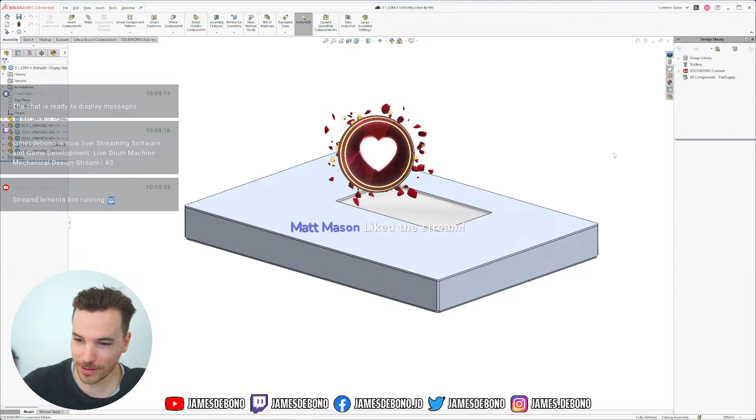It is a device which, let me show you, currently is looking like this. Matt, thanks for the follow sub, not sure what it was.

So currently looking like this. Pretty basic, it's just a box, a folded sheet metal box with a display. That's all I've gotten up to at this point.

But it will be something like, let me just bring it up. I'll just bring up some inspiration images in one second. Sorry, I should have organized this earlier. Okay, here we go. So these are inspiration devices.

It's not going to be anything like one of these in particular, but it is going to be a digital drum machine, so an electronic digital device which you can play drum loops, drum sequences with. There may be some playable elements like we see here with the sticks hitting pads. There will likely not be so much sequencing, but more like looping kind of functionality.

But it's essentially designed to be a device which you can play drum beats with, and it should feel like a musical instrument. So it shouldn't feel like you're programming something, but rather you feel like you're actually playing a beat. And when somebody watches you playing it, they should also be able to recognize that you are playing an instrument and that there is some musical feel to it, and it's not just pressing buttons and programming codes and stuff. So that's a general scope of the project.

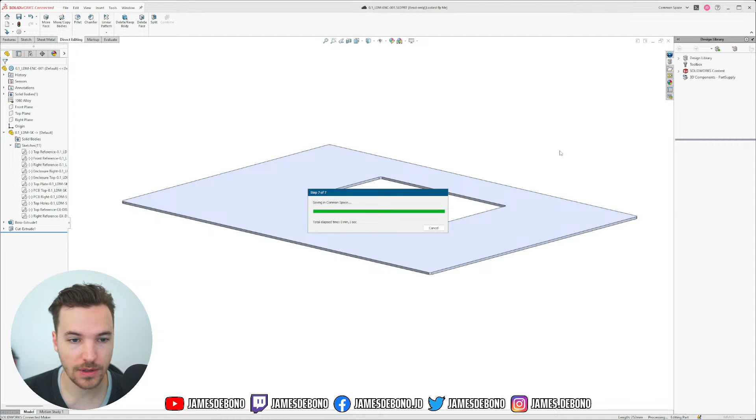So I'm going to close this. Where I got to last time is I was starting to add in some jacks. And the first one I thought we would add is a 1/4 inch or 6.35 millimeter TRS jack, something like you can see here, these jacks here.

So likely this device is going to have 2 analog audio outputs, and they'll either be 1/4 inch jacks like this, or they could be XLR.

Not entirely sure yet, but we will likely also have a couple of inputs. Not exactly sure what those inputs are going to be yet either, whether they're just for audio, for sampling and things like that, or if they're for some kind of drum trigger.

Oops, zooming the wrong way. So this kind of device, or another drum pad, could be used as a drum trigger, and it could be nice to have some trigger inputs here. Something like you see on an electric drum kit, where you can plug a snare drum into the drum brain, and you're plugging it in as a trigger.

So I'm going to add in some of these jacks. Maybe we use them, maybe we don't, but at least I can start laying them out. And we're also probably going to have full-size MIDI jacks, so I'll add them too.

We'll either have a USB type B, which is this one here, or USB type C. Not completely clear yet. Maybe we would power the device with USB-C, maybe we'll power it with a barrel jack like this, but I'm just going to start adding some things in.

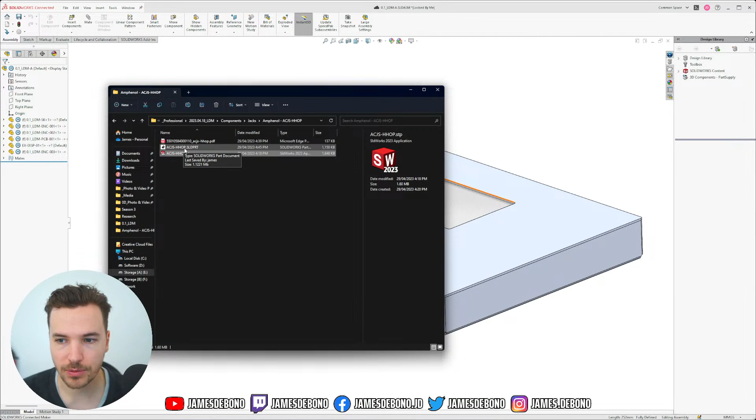And I got this Amphenol jack, which I've made — I've got the data sheet here, I've got the step file, which came from their website, and I've turned that into a SolidWorks model, which just gives me a bit more freedom.

And I can add some — no, I don't want to do feature recognition. I can add some details to this, like a dimension sketch.

So this is important for my skeleton model. If I turn off all the solid bodies, I can see here I've got all my dimensions, which should match with the data sheet that I have here.

So why is that so zoomed out? Let me zoom in a bit. So I've only done a sketch from the top view, which has all of these dimensions. Now I need to do a sketch from the front view so that I can get the height of the jack from the PCB.

And yeah, all this extra data, because I'm going to put this all into my skeleton model. So this is good from the top view for now.

If I want to make a movable copy of this in my skeleton — this might seem a little bit abstract now, but it's going to make sense later.

But I need to have — like I want to make another sketch of this in my skeleton where I can make all the lines equal to the lines in this sketch, so that I can move that sketch around and it'll stay proportionally the same to this, but I can move it anyway.

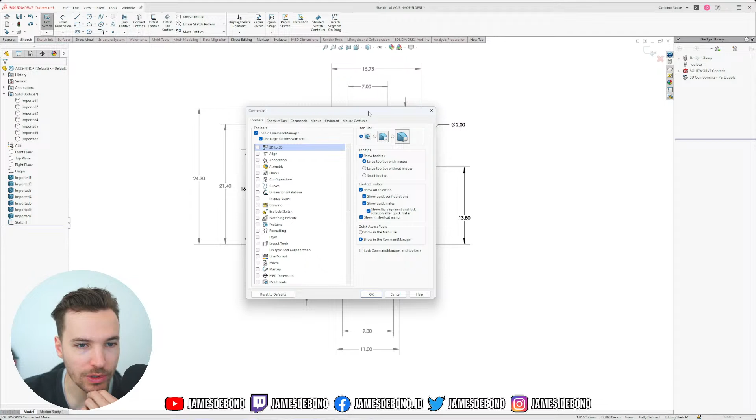But what I need to add is a shortcut here for — what is it called? Something where you can create — there we go, split entities. That's what I want, so I want to put that here. This tool allows me to split a line into two lines.

Okay, and what happened there? Something weird. Yeah, this dimension. Okay, I'm going to join that line to there.

So now this vertical height I can copy, and this line, what's going on here? I'm gonna split this one as well and put that there, and then I just need to dimension this line. And this line's vertical position also isn't defined, so I need to split this again and link it to that. This will all make sense soon, don't worry.

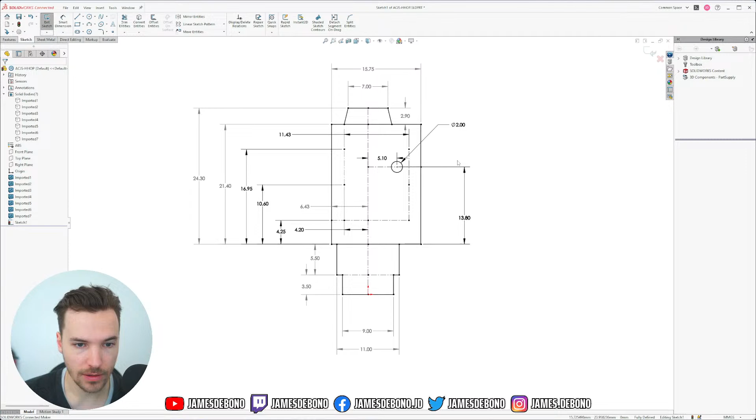Okay, so now I'm going to do a sketch on the front plane. I can show this. So I basically just need a rectangle and a circle, maybe two circles. Maybe I'll do like the inner diameter and the outer diameter. The pin depth could be relevant too, maybe not, I'm not sure.

Okay, so I'm gonna hide this again. Put in a rectangle. Connect it to this, so our width is defined. Then I need the height, 12.7.

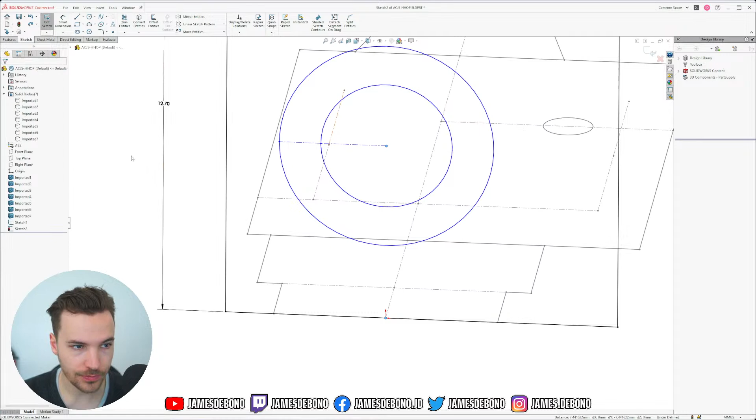Then the jack hole, I guess you call it. I'm gonna put some horizontal lines here because then I can make them - oops, that's not what I want. I can connect this line to this line, that's the center line. Then this outer line I can make horizontal with this. And then I need to define the height, which is 6.5. That's not what I want.

Actually, I don't need to break this one into segments. It's probably easier if I just have that as one line. Okay, 6.5.

And the inner diameter is what? Does it even tell me? No. Well, we know that - actually, I don't really need the inner diameter, now that I think about it. Because we know what plugs into it is 6.35 millimeters, but there's nothing in my model that needs that dimension, I don't think. It's only going to be this part which might stick through the enclosure, so I'm going to leave that there.

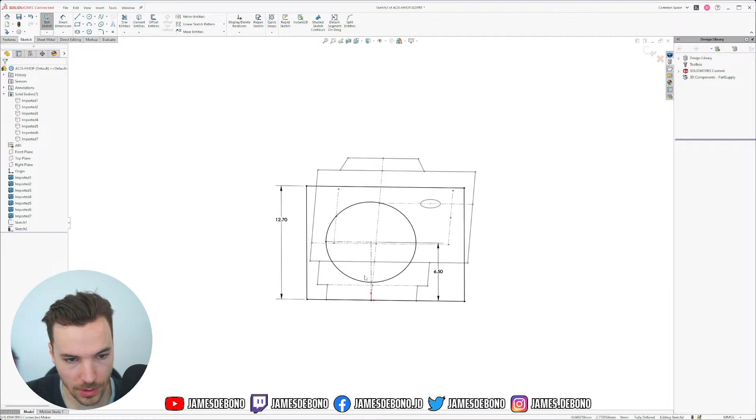We have on the dimension drawing a panel cutout, which is the hole that would be needed for fitting this through. But I think that's going to be to fit the entire thread through. But I don't actually want to put the thread through the hole. I think we're going to do it without a nut. Might sound risky, but I think it's fine. This has a screw hole in the bottom, so we can actually screw it in from the PCB, and that leaves the outside looking very clean.

So panel cutout is 11.2. Let's just put that in there and see. Yeah, so it's actually even wider than the thread, which I don't think we need that. So I'm going to leave it out. I don't even think I'll put the thread in there.

I think that's all the information I need. I've got the pins. I didn't put these pins in there though. These are like locating pins. So I should put those in. Yeah, okay, I'm going to do that.

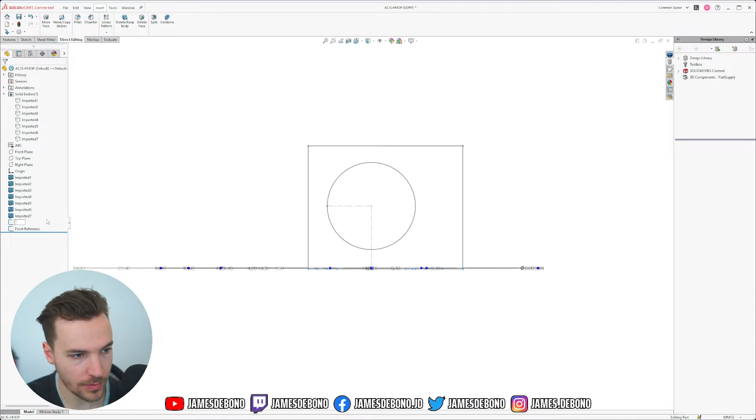So I'm going to name these front reference. Why is it so hard to bring up the rename dialog? Oh, top reference. Okay, so go back to my top reference.

I'm gonna use my split entities again, so I can split this line and make these horizontal. Were they again? 7.45.

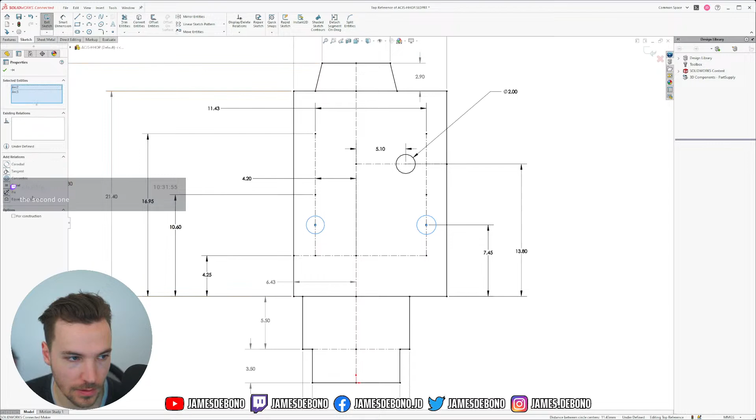7.5 was it? 7.45. Okay, and I should probably put the diameter of those pins in here as well. Make those equal. Does it say the diameter? Ah, I remember last time I was getting confused about the two diameters, but it's for two different pins. So that one's 3, this one's 2.

The second one, flop flop. Okay, great, that's very easy to pronounce.

What are you working on there? I'm working on a drum machine. It's a digital drum machine. I can show you, like, inspired by these kind of devices. But it'll be something like a drum looper, I guess. And it's a standalone hardware device, and it will be digital. So hopefully that's not too contentious. But yeah, it's planned to have probably like a Linux-based system on module running software inside it, which sounds pretty complicated, but I'm working with 4 other guys who are pretty knowledgeable with this kind of stuff, so sounds great so far. I'm glad you like it. Thanks, man. Yeah, I guess some people, I don't know if you're coming from just an interest in design or an interest in synths and stuff, but yeah, some people in the synth world really don't like digital stuff, but come on, you know.

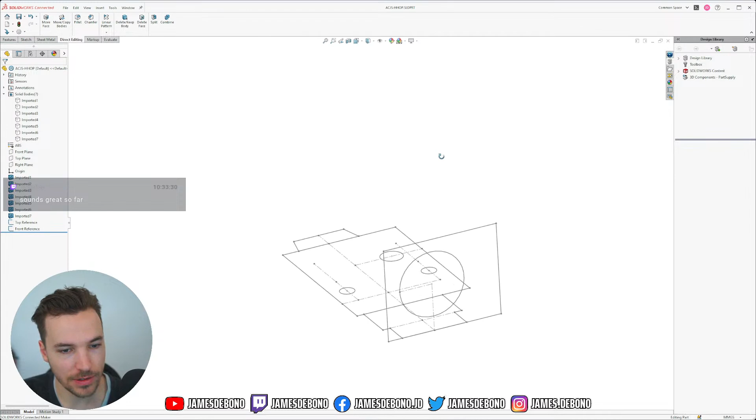Okay, so what was I doing? Now I've got my jack here, which was a step file I downloaded from Amphenol's website. I turned it into a SolidWorks model and added two sketches, a top reference and a front reference, which is kind of like having the data sheet inside your CAD model. I'm going to show you now why that's a good idea.

So if I go back to my drum machine, and back to my skeleton model for my drum machine, and drag back to the top here, I'm going to insert my jack without body materials, part materials, or any solid bodies, only sketches. So I insert that, and all that's been inserted is the two sketches, which is great because I can use these sketches to create some movable geometry in my PCB plan.

So if I go to my PCB sketch, well, what I should do, just to make life easier, is rotate this because the jacks are going to be at the back. I can do that by changing the way I inserted this - locate part with move copy feature. I'm going to use mates.

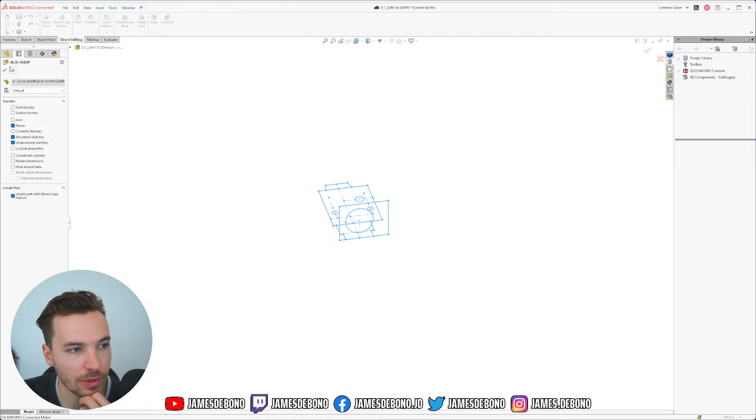So I need to bring in planes, edit this, bring in planes, locate with move and copy feature. I'm going to mate the top plane with the top plane. So that's all good. And then I'm going to mate the front plane with the front plane, but I'm going to reverse it.

Reverse it. Reverse it. Why didn't that work? Did it work? Maybe. Let's see. It did work. Okay, the preview just wasn't showing it very well.

By the way, flop. If you're still there, I don't know. But if you want to talk, tell me a bit about yourself. Are you a designer as well? What brings you here? Or are you just browsing? And tell me if my pronunciation was good.

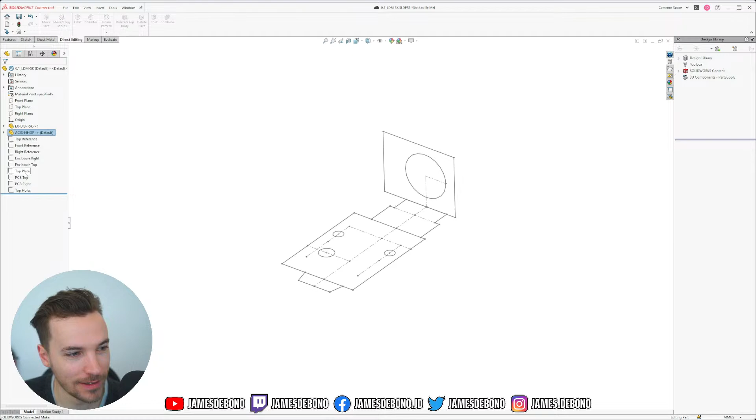Okay, so I'll go back to my PCB top. I'm going to hide the front reference. So now I want to make a movable version of this jack that I can move around in my PCB layout. I'm also going to show the enclosure top, because the jack's going to go through the enclosure.

Alright, so I want to make a movable copy of this with all of the geometry, but no dimensions. So I'm actually going to - how can I do this? Alright, I'll do that. Convert all the entities.

Convert these two. Then I'm going to delete all external references. But I don't want to delete everything. Wait, what sketch am I in here? I'm in the enclosure sketch. Idiot.

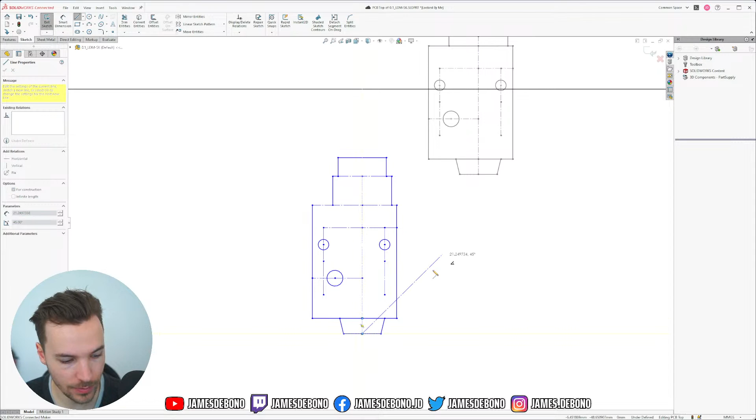So now I want to make a copy of this because I'm going to have at least two. What would be great, actually, I'm going to demonstrate this later, so hopefully either SolidWorks can change something, or somebody can teach me something. But okay, make those equal.

Let's do all the construction lines first. Make those equal. These equal. These. I'm gonna do something here so I can tell when it's defined.

This is annoying. Okay, these don't have horizontal and vertical definitions. Oops, not definitions. What do you call it? Relations.

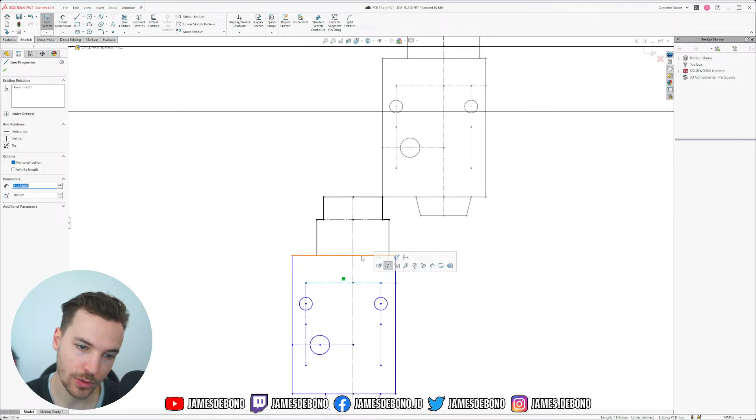Probably need to split this line. Okay, come back. Wait, I'll just explain why this is important. I think I almost explained it before. So I'm not going to be able to define where this should be positioned horizontally unless I have a line segment, which is - actually I can use this. Yeah, that'll work. I have to have a line segment attached to this middle point, so I have some kind of dimensional reference for where this should be.

And that needs to be linked to this, and this needs to be connected to this. And why? Okay, alright, so now this is defined and this is defined. That's what I was hoping for. Okay.

All these points are disconnected from each other, which is very annoying. I definitely didn't do this the ideal way, but that's all right.

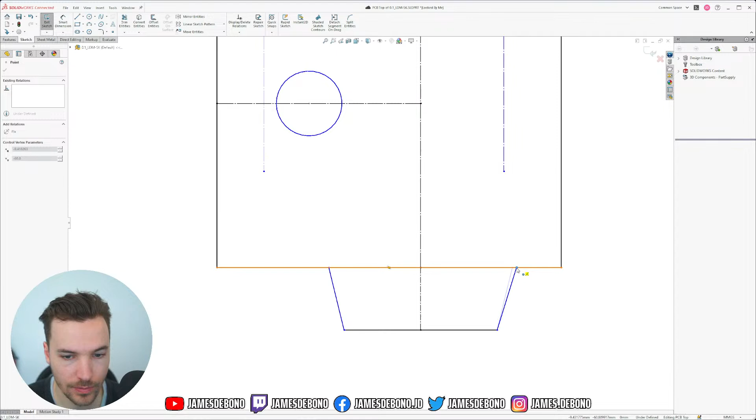I make this equal to this, and this equal to this. That should define it. Yep. And then this equal to this. And that needs to be horizontal.

Another thing I could have done, instead of making them all horizontal and vertical, is make them like right angles to each other, which can also be a good idea because then you can rotate this, but I didn't do that, so I probably should have.

But I don't think it's going to be a problem for this device. I think it's only going to have jacks on the back. So,

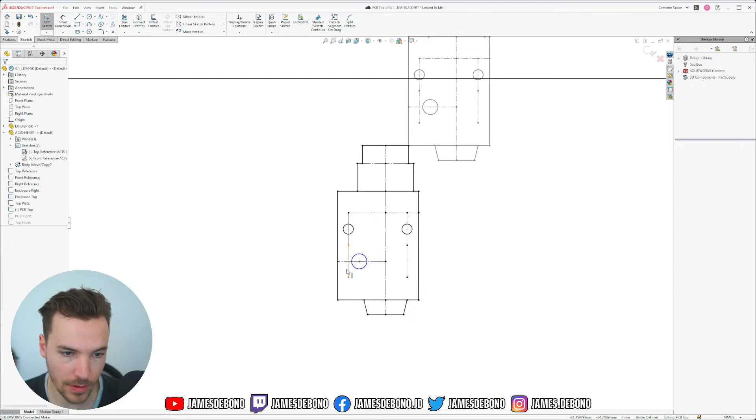Are these equal? They are now. This equal to this. These horizontal. This equal to this. These two equal. These horizontal. This equal to this. These horizontal. And

So now if I disconnect that, I have a movable version of this jack where everything is proportional as it should be.

Yeah, I think that's... Was there something else I forgot to do? I can't remember.

Oh, right. So now this is the problem where I want to know if somebody has a solution for this, or if SolidWorks has a solution for this, but if I copy and paste this, all of those external references are lost. So it'd be great to know if I can paste with external references. Maybe I'll quickly Google that.

Paste sketch with external references.

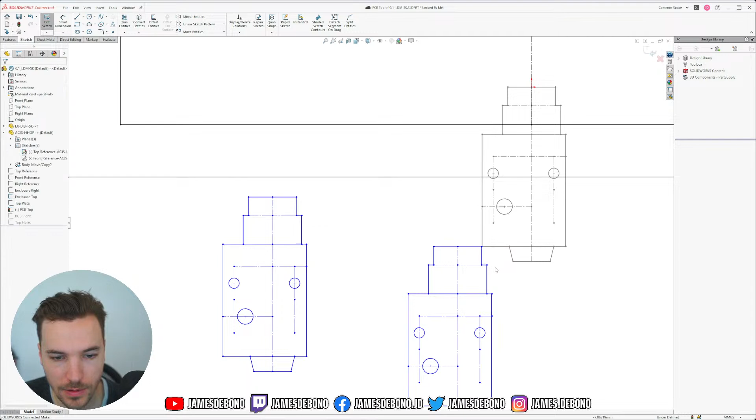But at least all the horizontal and vertical relations and everything are still there. Why didn't it like that? Okay.

Apologies if this is a bit boring.

Almost there. One more, two more, one more.

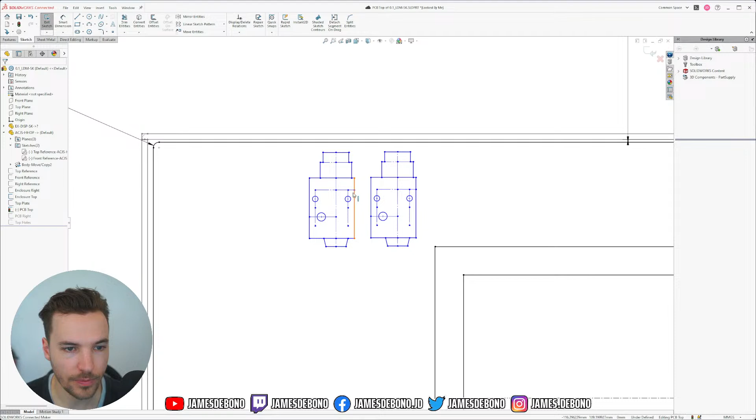So I want the opening of the jack to be flush with the outside of the enclosure. So I'll connect this to there, just by dragging it on, letting it become coincident. Then I can define how far apart from each other I want them to be. Let's say 20 millimeters. And I can say that, I don't know, I want them some distance from the edge of the device. Let's say 80. This is all going to change, so it's just temporary.

But yeah, for now I just want the sketch to be fully defined.

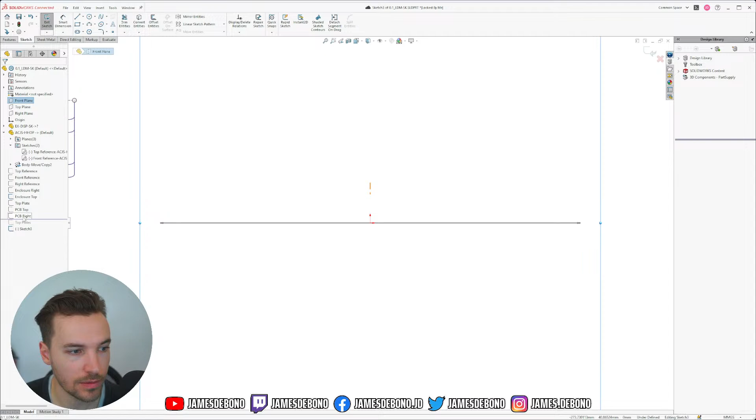Then we have our PCB. We have a PCB right sketch, but I should also make a PCB front sketch, so I can put the jack holes in there. So let's make a new sketch on the front plane. And PCB top and PCB right, we can put in where the PCB will be, which I can link to the height of this, and I can link to the width of this.

And then I need to make some movable versions of the jack. So I'll just do a rectangle, a circle. Now I don't have the position horizontally here, so I can either split this line or I can add a little line there. I think I'll do that. So let me just do this for now.

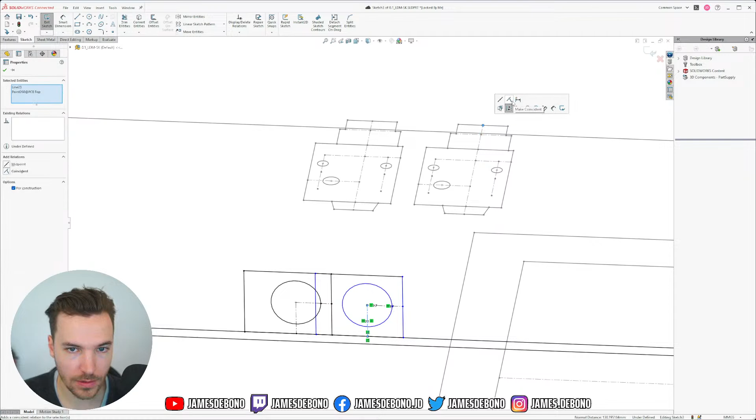The height is going to be, well, they're going to be sitting on the PCB like this. And if I show my PCB top, the center line is here and here. There we go. Can hide that. So that's going to be where my jack holes come through the enclosure.

So does jack hole sound like a swear word? I don't know.

PCB front. Okay, so now I've got my PCB front and PCB top. And I'm gonna have a sketch for rear holes in the enclosure. So I'll also put this on the front plane. And I'm going to put some holes based around these jacks.

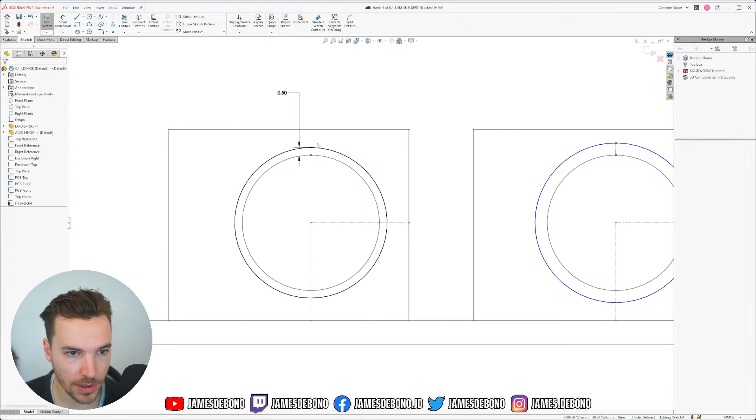I'm going to put a little line there to define the offset - how much bigger these holes are going to be than the jack. I might make it 0.5 of a millimeter gap around the edges. I can define it once and make my other line equal so that my other circle is equal.

I'm going to call this, if it lets me rename it, rear holes. Show us your rear holes.

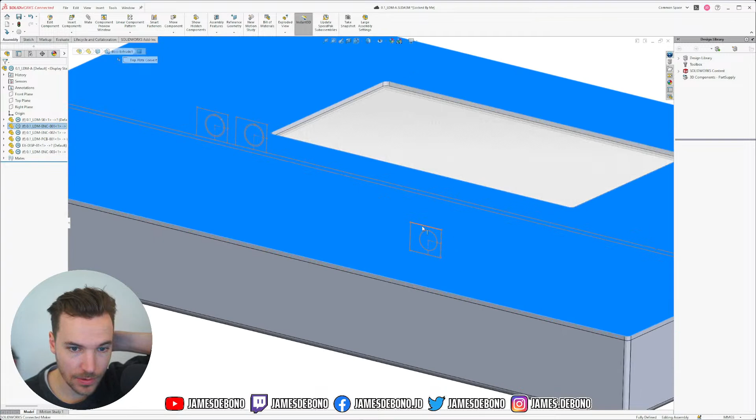I've got a lot of messy new sketches shown in here. I'm just going to hide them because I'm OCD like that. Gonna have to hide them for every part, every unique part. So it looks like what I'm doing is doing nothing, but actually every unique part has this sketch in it as well. So I have to hide all the overlapping versions of this sketch. And why can I still see it? Whatever.

So I'm going to make some holes in my enclosure. I'm going to turn on rear holes. Actually no, I'm going to put a sketch on the front plane and just copy my rear holes.

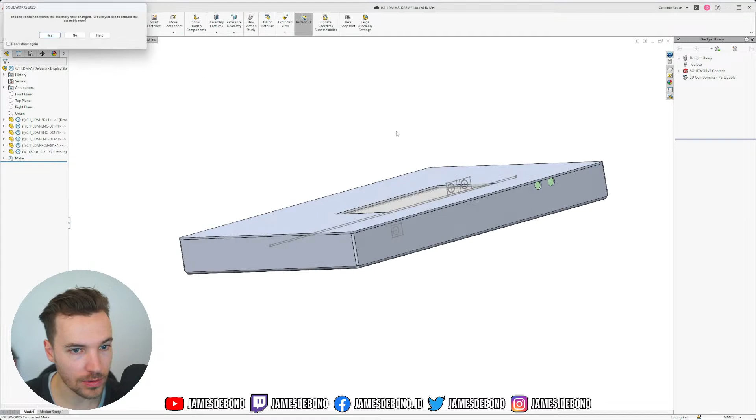It looks very high, doesn't it? Extruded cut. Through all. So I think that is telling us that our PCB is too high, but we'll see. When we go back to here, I'll make this transparent. Yeah, so it looks like our PCB is too high.

So what I'll do is put the jacks in and we can see just how high it is. So I want to insert that part, and I want to do it twice. Actually no, I'm going to do it once, and then I'm going to copy the mates.

I'm going to mate the front plane with the front plane in a reversed direction, the right plane with the right plane parallel. I should have also done that with the front plane. Let me just edit that mate - should be parallel, not concentric.

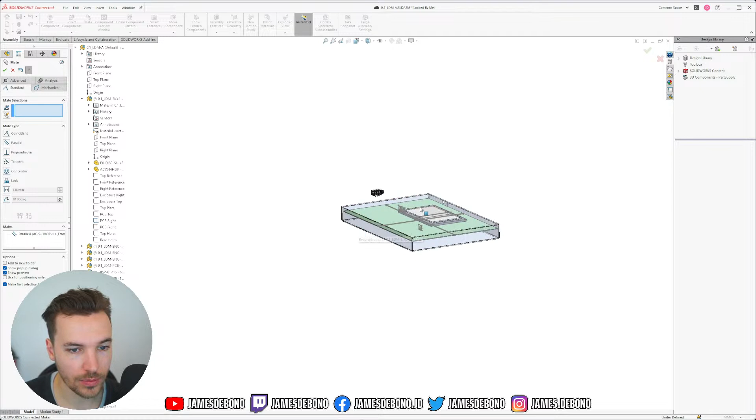And then I want to turn on my PCB right. What's happening? Bit slow. I'm gonna mate the top plane with the top of the PCB, and turn on my PCB top. Mate the front plane with the front of this jack, and the right plane with the center of the jack.

So our jack is in place on the PCB, and yeah, we can clearly see that this PCB is too high in the enclosure and the jack's sticking out the top. So I'm gonna have to make some changes there.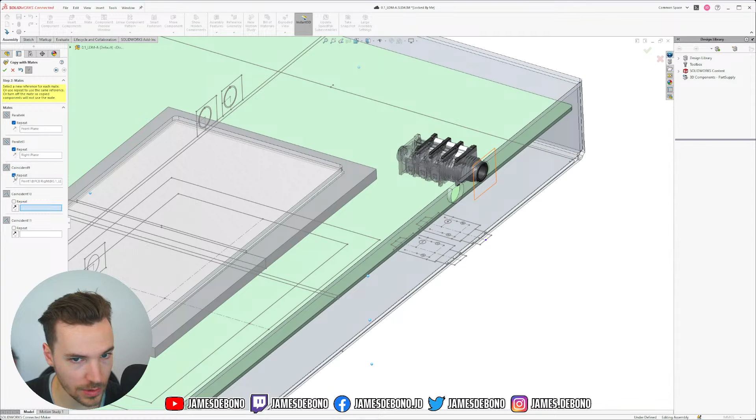But first I'm gonna put in my other jack, and the way I can do that is by clicking this one and choosing copy with mates. So this parallel mate I want to repeat, this one I want to repeat, this one I want to repeat, which is the height of the PCB, and these two are just about the position. So the front will be there and the right will be there.

Okay, now I've got my two jacks positioned exactly where they should be. And I'm gonna turn all these sketches off. No idea why these ones are still showing and why I can't click on them. It's kind of bothering me a little bit.

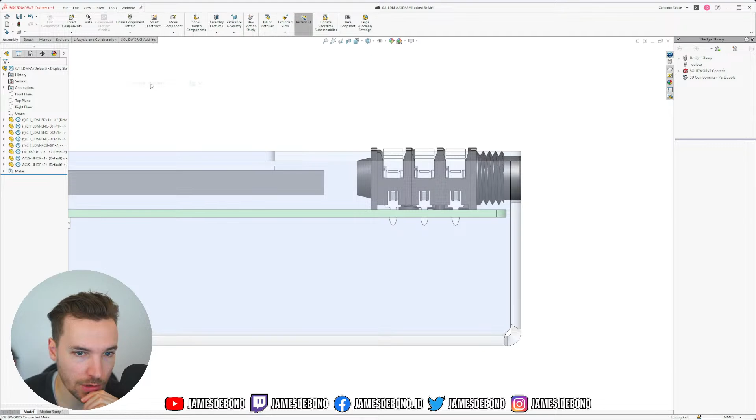Whatever. Okay, so we need to make these jacks a lot lower. And I think a good way to do that will be if we can actually see in the PCB right sketch how high they are. So I'm going to go back to my jack, and I'm also going to add a right reference.

I'm going to make the main switch body like this - switch body, jack body. I'm just going to define all of this with the other sketches, not with the bodies. So that can go there. Do a center line.

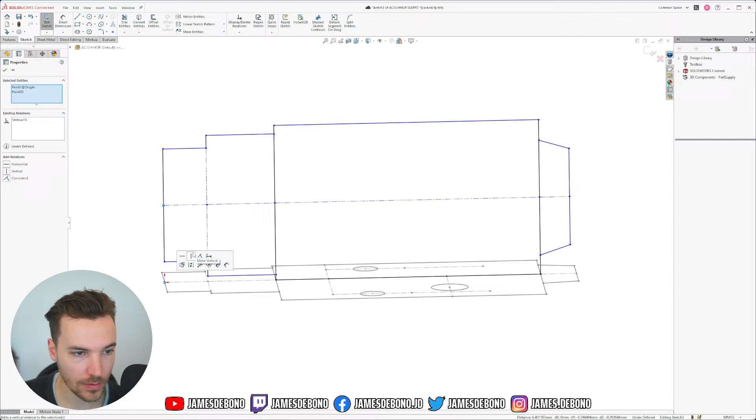Okay, I will link it to the geometry. Oh, that's bad. Why is that angled in like that? What did I even link that to? Whatever.

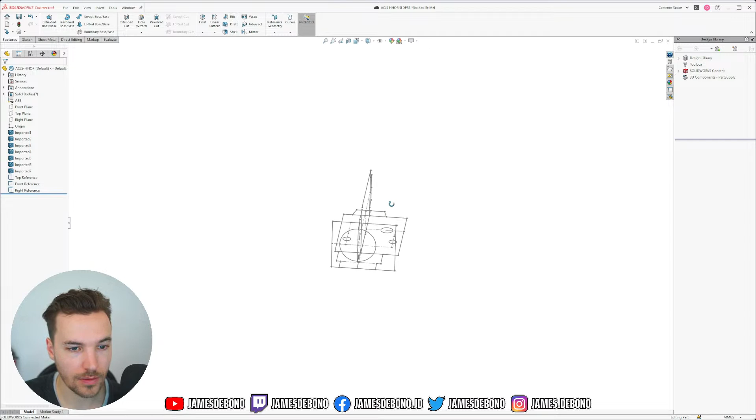Gonna go to my PCB right. Yeah, if I paste it here, it's facing the wrong way. Can I flip it? Maybe I can scale it -1. No, god damn it. Mirror? Mirror about this. It's gonna have a mirror reference. So annoying.

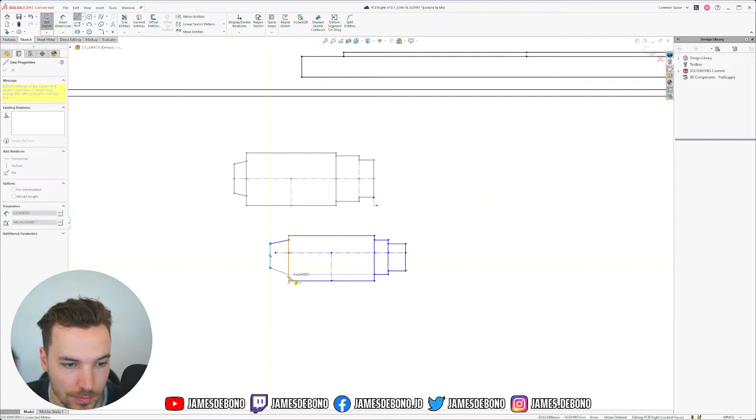Stretch - that wasn't stretch. This is move. Does anyone know how to do this? Whatever, drawing it from scratch.

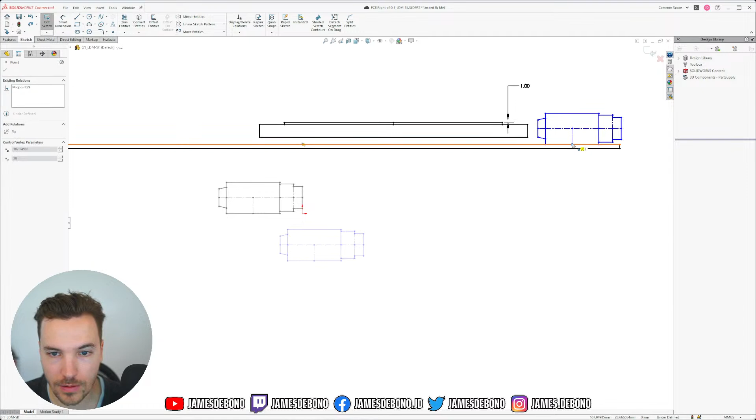So, what happened? PCB top. And I'll align that with that. Okay, so now I can see, if I put my enclosure on, I can see how high it needs to be. So I can get rid of this height definition of just a random number of 10 that I put in there. And I'll hide this.

Now I can move the PCB down with the jack, and I can define how high I want the jack to be from the top. It could be that we say, okay, I want the top of the enclosure to hold the jack down, so that if someone bends on a cable here, it won't push the jack up because it has nowhere to push it. So I could do that, or I can define some small gap there, say 1 millimeter.

This height is going to be determined by other things as well, like the buttons and all that too. It may be that we want the jacks further down on the device, or maybe we put them on the underside. That's also a possibility. And if I do that, I'm going to have to rotate all those sketches, which will be annoying, but whatever. Cross that bridge when we come to it.

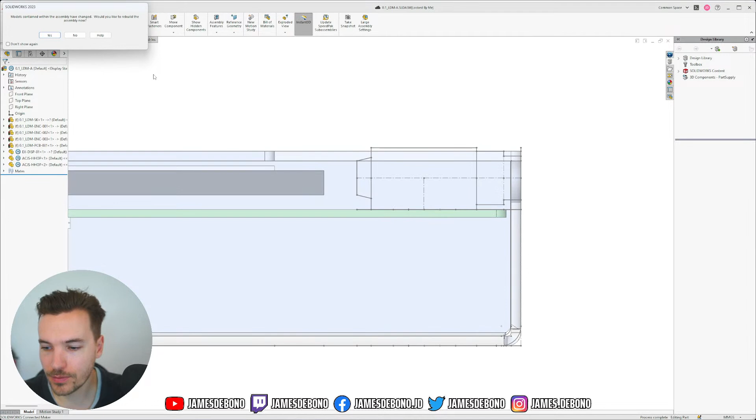Now, if I update the model... look at that parametric beauty. That should be showing.

And hide all these sketches. Still can't hide those ones. But yeah, so now just updating the skeleton model. All I did was move the position of the PCB down. That moved my jacks, and it also moved the holes in a completely different part. So that's the great thing about parametric modeling—everything is linked and everything updates.

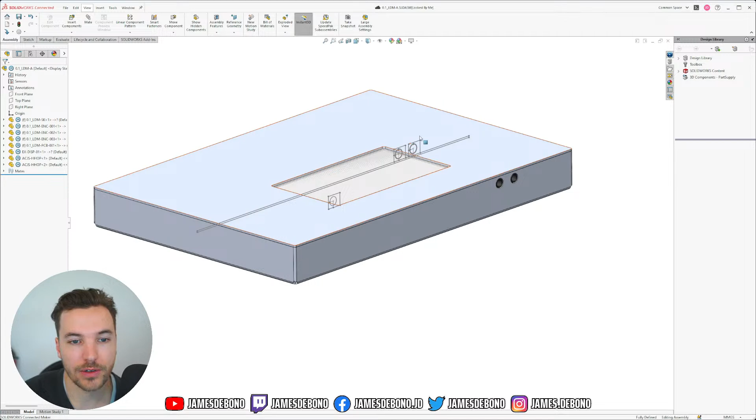God, that annoys me that these sketches are showing. Why are they showing? PCB front. Weird. Don't know why I couldn't select those. Ah, because they're on a transparent part, and you can't click transparent parts. Makes sense. Also, don't do that SolidWorks, but makes sense.

Cool, so got some jacks. They look very high on the device. And you know what, maybe I want the whole device just to be shorter, because I see no reason for it to be that big yet.

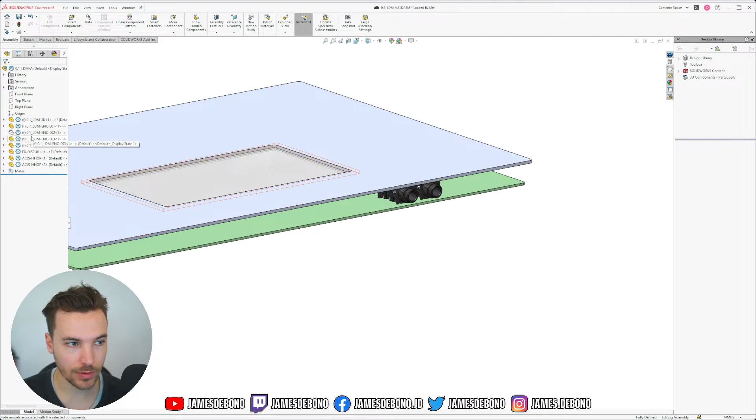There we go, now it's 30 millimeters tall. Plenty of room, look at that. Probably the PCB will be a bit lower than that, but we'll see.

What should I add next? Maybe I'll put the holes in the PCB for these locating pins. The actual solder pin holes I generally leave to the EE guys, like whoever's designing the PCB, because they'll have the pad layout for the jack, and they can put in these holes, and they can choose to use these pinholes as a locating point for actually locating the jack. Either way, there's lots of ways to locate it. I generally provide a drawing of exactly where everything should be located for the guy designing the PCB.

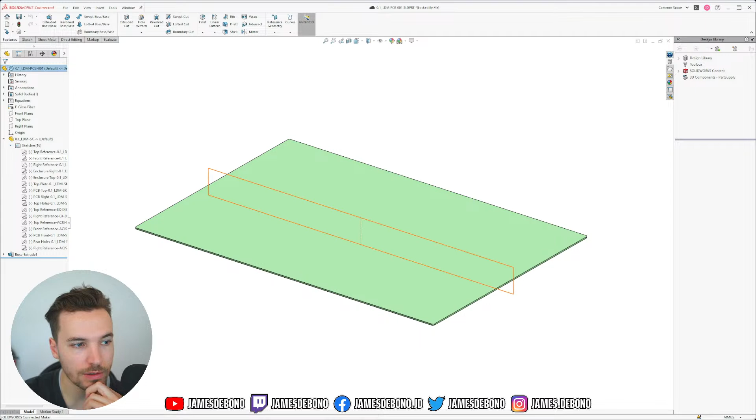But just for the hell of it, I can go to the PCB part, and I can turn on my PCB top, which is all out of order for some reason. And I can select all of these. Actually, maybe these holes should be a bit bigger. Make them all equal, make these equal.

And maybe make it... I don't know, 2.2. Probably needs to be bigger than that, but whatever—3.2. Then I can extrude a cut, through all, yeah, other direction. There we go.

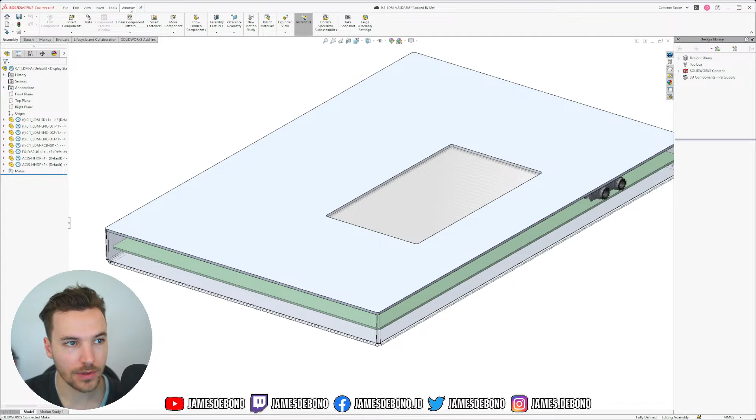What to do next? I could put in more jacks, I could put in some buttons, I could put in knobs. Or I had an idea for this display protector problem, which I was trying to describe last time on the stream. Let me just bring up Paint.

Whoa. Can I draw a straight line on here? Is there a button I can hold? Maybe not.

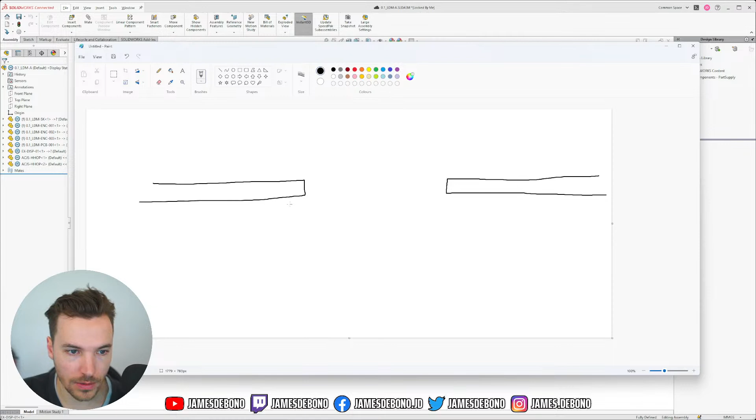If I was to CNC machine this top plate, what I would do—well, let me explain all the options. This is what you do if you just have a square hole like this. You can CNC cut a piece of acrylic. This is looking from the side view, by the way, like this. And that fits up into the enclosure by pushing it in this direction, and then you glue it here and here, and that's your display protector, with your display underneath. The problem is that if you push down on it from the top, like if you actually push it with your finger, it could pop out, or it could damage the display.

So an alternative would be, if your enclosure was machined, you could actually machine... sorry, there's another problem with that. With this shape of display protector, you can't just cut it out of a flat sheet. You also have to machine these steps, which is time consuming and expensive.

Now, if the enclosure was machined, you could machine a step into the enclosure like this, and then just put a flat plate of plexiglass or glass over the top. That makes the plexiglass much cheaper and faster to produce, but CNC cutting the enclosure top takes longer and is more expensive. So what's my idea?

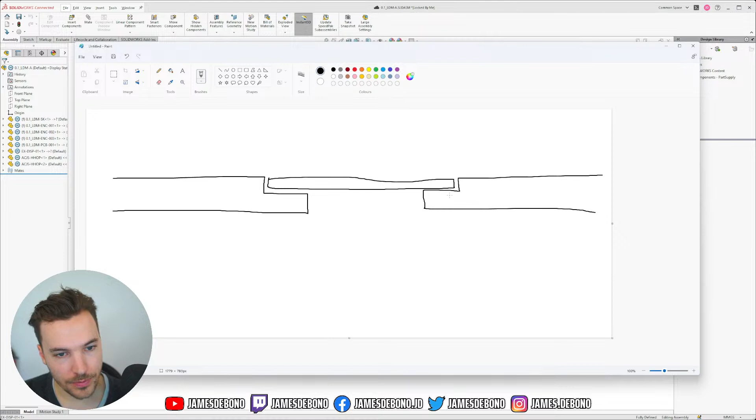I want to avoid machining if possible, because machining is expensive in low quantities and even more expensive in high quantities. It's just not really viable for mass production. People do it, but it's expensive. Cutting flat sheets is much better.

So my idea is to do 2 layers on the top sheet, on the top of the enclosure. So if I have one layer like this, and then one layer like this, they're not even aligned, and then my screen protector like this.

Now last time I said I'd just put a little ring around there, but what I figured is I might as well make the whole top of the enclosure 2 plates thick, like maybe 1.5 millimeters each. There's benefit to doing that, because I can not only have this step that the screen protector can rest on, but I can also do things like put in screw bosses.

Like a screw boss like this, which is put in from this side, from just the first plate, and you can see it on the top. But if I put this other plate on top, then it hides it.

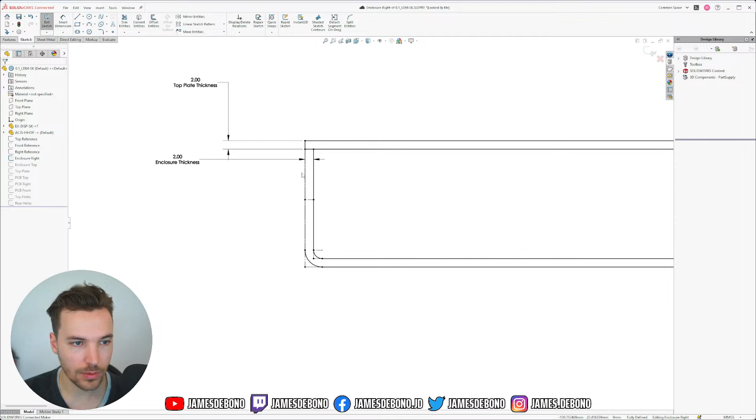So what I want to do is go back to my enclosure, and what I'm going to do is leave this as it is, and actually reduce this to 1.5 millimeters. Then I'm going to add a second plate inside this, and that means the walls of the enclosure will fit around this plug kind of thing, I guess.

This may or may not be a good idea, we'll see, might make it harder to assemble. Assembly will require some gap here. Actually, I'm going to put that gap in the enclosure top, because the front gap might need to be more so you can slide it in, or the back gap. We'll see.

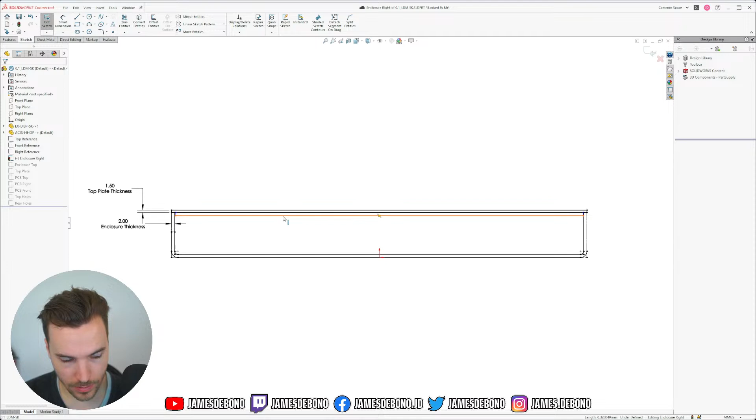Let's call this... what do I call this? Top plate 2 thickness. And this would be like a sub-assembly, so I'll have to figure out the naming. Oh, my enclosure top is after this, okay. I'm just going to make this go to the edge, I can define the gap in the other sketch.

Does that make sense? Yeah, should make sense. Okay.

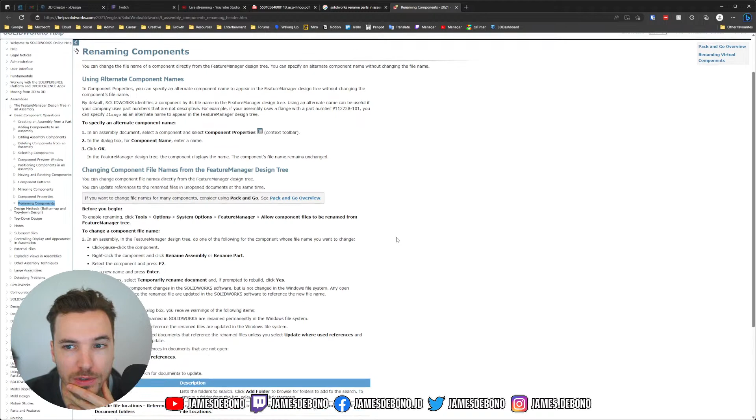The button doesn't exist anymore. Oops, it says there should be an option to allow component files to be renamed from feature manager tree. Which version of SolidWorks is this? Who knows? 2023. Same thing. SOLIDWORKS 2023. Tools, options, system options, allow component files to be renamed from feature manager tree. Where is it?

Whatever. Okay, it doesn't want to let me rename it. Let me write this down, something I need to work out after. Rename, and I'm also going to look into copy sketch with external references.

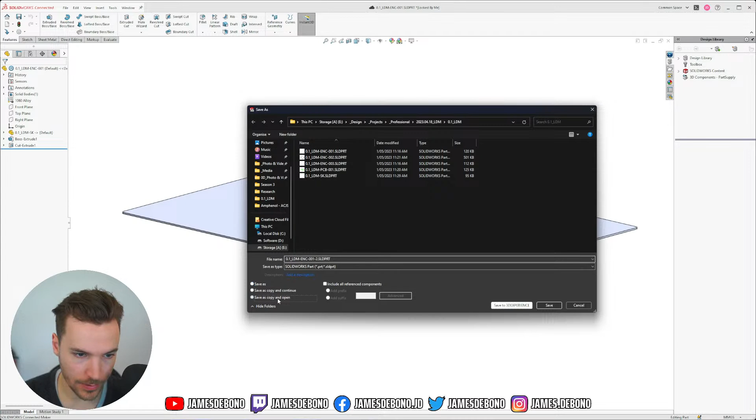All right, so what I was going to do is I was going to rename this one to 001-1, and then this new one to 001-2, and then the sub-assembly of those we called 001-A. I'll have to work out how to do the renaming later.

But I have made a second part here, and I'm going to make the extrude start at this vertex and end at this vertex.

Then I'm going to create a new assembly with these two parts inserted. So now we've got this double-up layer, and I'm going to name this 001-A.

Okay, go back to my main assembly. Now this is where what I explained in the last stream is really valuable - that all of your components that need to be mated in the assembly are not mated to other parts. They're only mated to either the origin planes or points on the skeleton sketch. The reason you don't want to mate parts to other parts is because something might happen where you need to remove a part, and if you remove that part you lose those mates. In this case I'm going to remove this part because I'm going to replace it with a sub-assembly. So I delete it, and I don't lose any mates.

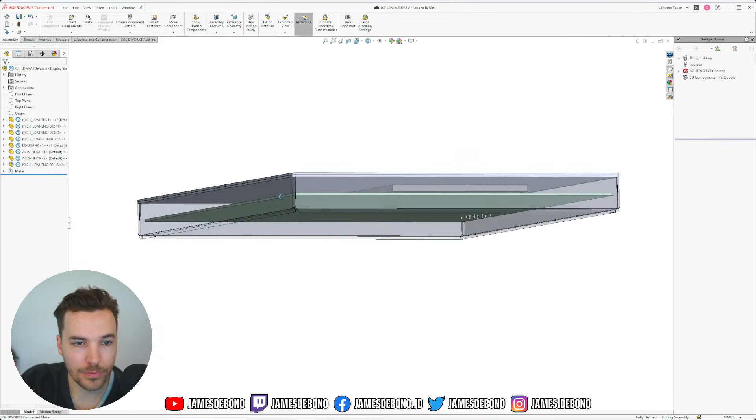Now, obviously the shape of this is a bit weird, so I need to define what the shape is going to be in my top enclosure top, which is going to be a big rectangle. Oops, let me just make it a bit smaller.

Gonna give it rounded corners so it doesn't stab anyone. Gonna make them equal, tangent, and trim the corners.

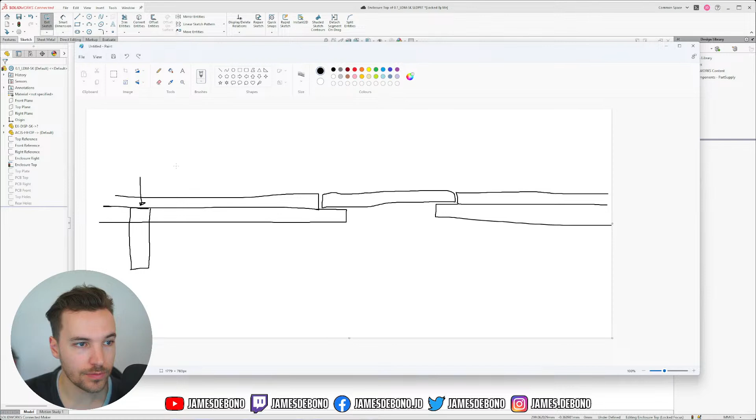Then I'm gonna define the distance to the top and all the sides. I'm going to make the distance to the bottom different so that when I have a box like this and I've got to insert something that needs to go down and then go this way, because the jacks have to go through the back wall, I want it to go down and then move across here. So if it ends up like this, then this can't go down here because that would block it from going backwards.

So it needs to go like this or something. Probably that distance needs to be more than the thickness of this material, because that's how far it'll need to go back for the jacks to get out of there. Okay, so that needs to be at least 2 millimeters.

I'll make it 3 millimeters. Then this and this can be equal, and they can be like 0.5. This can be 2.

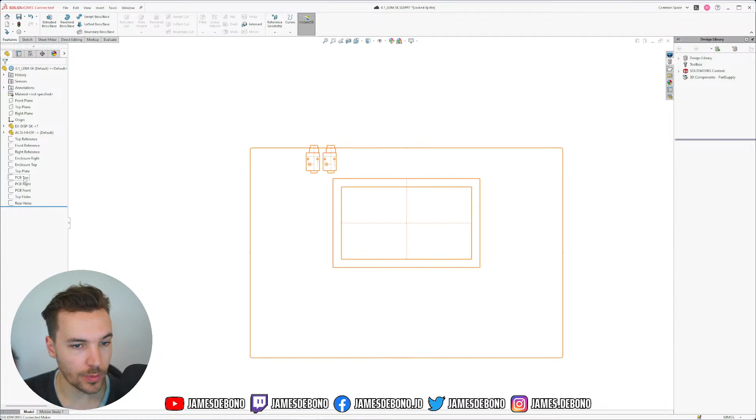And that means that the PCB also needs to be the same, so I can make that driven and then just link that to the enclosure top.

Okay, so I'll go back to my top plate 2, change the shape of it. Need the enclosure top, and I'm going to break my external references, which is all of them.

I want to put it in the skeleton. So I have top plate, and I want top plate 2.

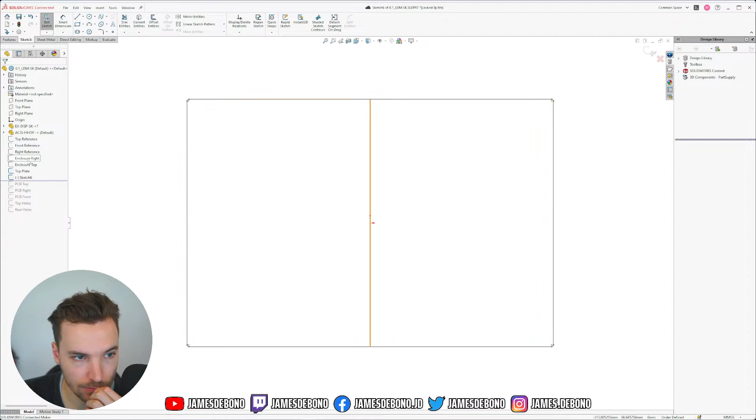Wait, sorry, I'm thinking. Maybe that thing I just added into enclosure top should actually be in top plate 2. Yeah, I think that's what I'll do.

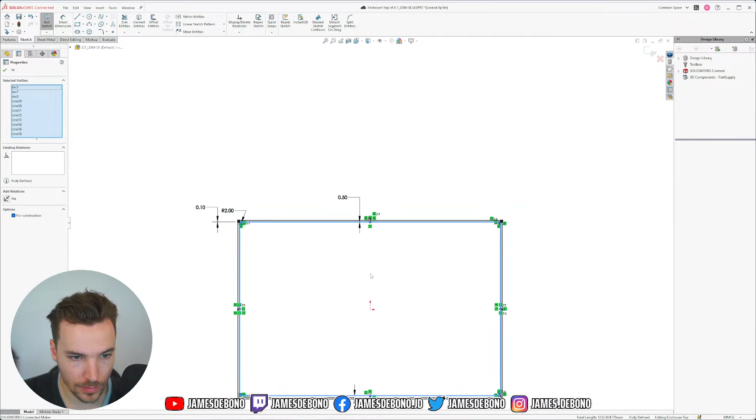Saves this sketch being so busy. I'll link the PCB sketch to it.

Come on, let me rename - top plate 2. Need to break this link. Why does that have dimensions linked to it? Gonna risk it, see if I lose anything. Nope, okay.

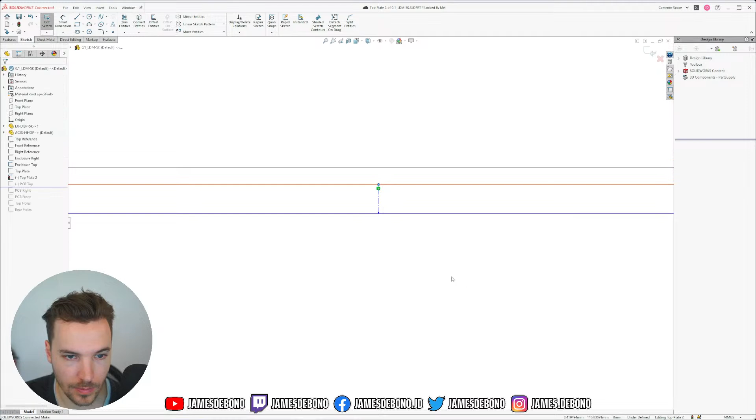Come on. I don't want it to be linked to the middle point, because it doesn't need to be. Sometimes that can make things a bit annoying, they get broken. Lost this corner somehow.

Okay, top plate 2. I can link my PCB top back to top plate 2. Accidentally linked it to the midpoint. There we go.

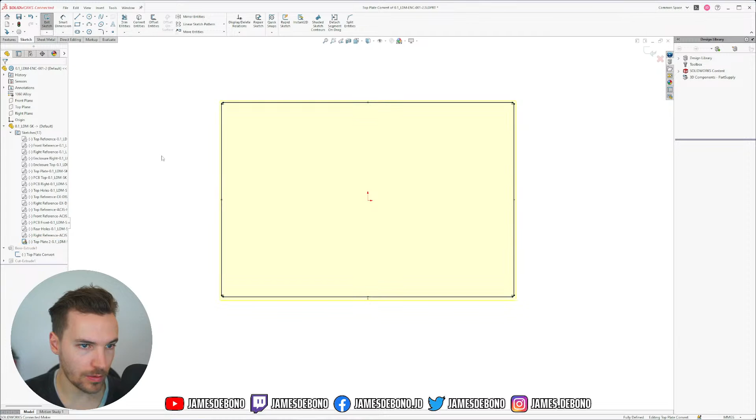Okay, now go back to this part - top plate 2, convert entities, top plate convert.

Hide all my sketches. Okay, there we go. Got my 2-layer plate, and I can isolate this sub-assembly and see that, yeah, it's two plates stuck together with a kind of lip around the edge.

Now I need to make this part smaller for the display protector, or this part bigger. So what I'll do is I'll put...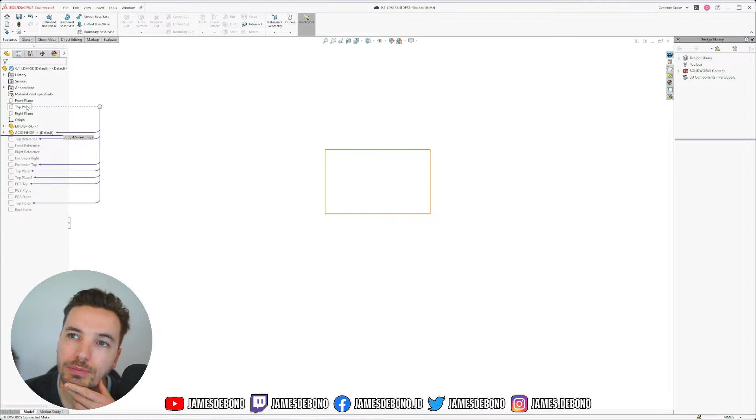I'm going to put a display protector drawing in here. I'm going to base it on the display.

Gonna have 2 rectangles with rounded corners. Whoops. And I think what I'll do is make the outer radiuses concentric with the inner radiuses, because I think that visually looks good. I'll show you what I mean.

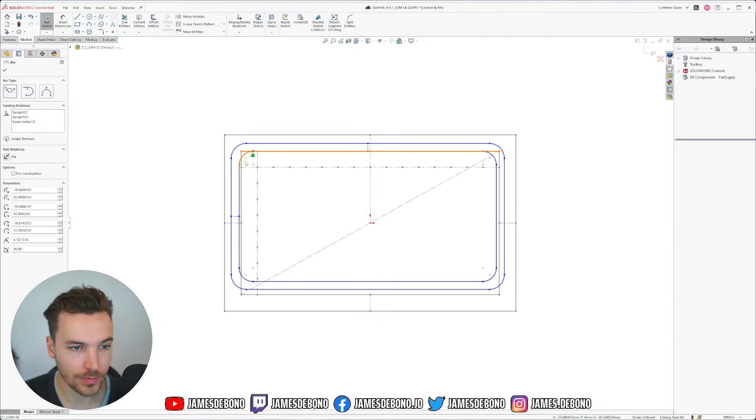So, oh my god. Okay, I've got my screen size there.

Let's say I have a 2mm radius in the corner, and I want my display protector border to be 10mm. If I also make this radius 2mm, in my opinion, that looks weird. I mean, it's not horrible, but this corner looks super weird, being the same as that. It's not my vibe. Maybe we change it to be like that, I don't know.

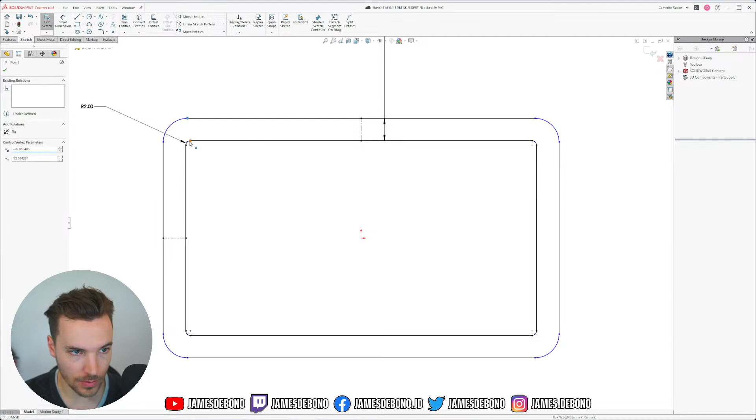But I much prefer when these are concentric, so it actually looks like something that's bent around that inner radius. I think that looks better. Other people are free to have their opinion, but that's mine.

Okay, so I'm gonna call this display protector, and I'm gonna have a center point there so I can make a movable version of this on my top plate.

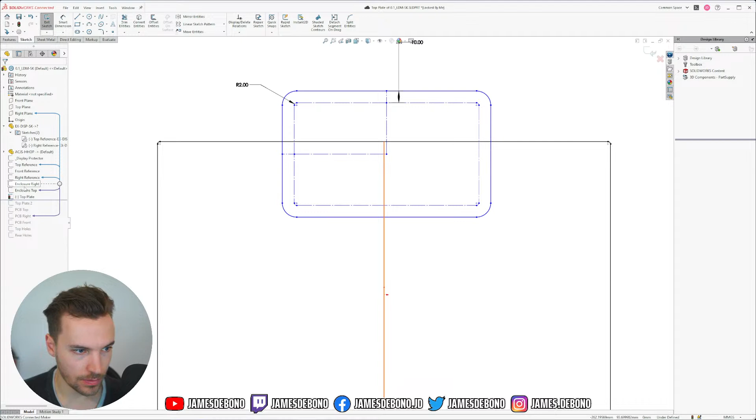Can this all be construction, please? Okay, hide that and then show. No, this goes in holes, my bad. Top holes. Top plate.

So actually I want to get rid of this, put in this, link it to my PCB top, and give it these dimensions.

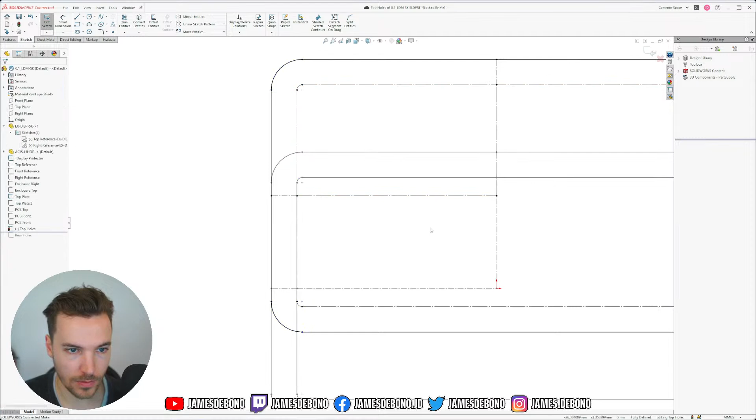So this will be top plate holes. Then I also need top plate 2 holes. This is starting to get confusing. Top plate, 2 holes. Okay. I don't know why that question mark is always there.

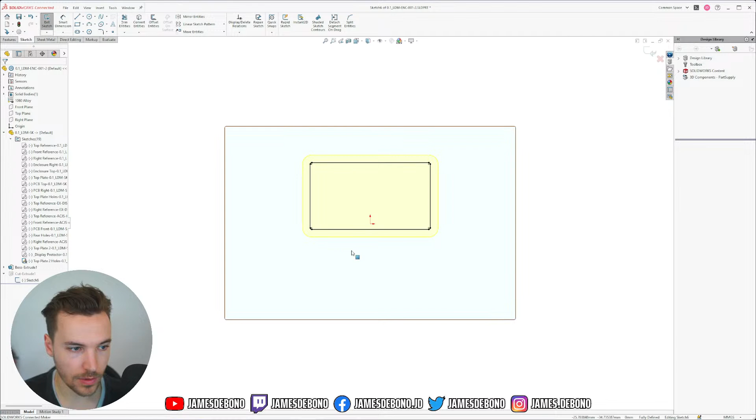That's better. Looks like that updated okay. And then this one, gonna delete that and get the top plate 2 holes. Yep. Okay.

Then my assembly looks like this, and this is where my display protector will slot into nicely. Let's check. Oh, and what do you know, my display protector already fits.

Display protector is this one. Yeah, okay, because that was linked to the top holes. Perfect.

Why is there a sketch showing? Where is it showing from? Oops, what did I do? I closed it. Just gonna close everything except for the skeleton, and open it back up. Okay, sweet.

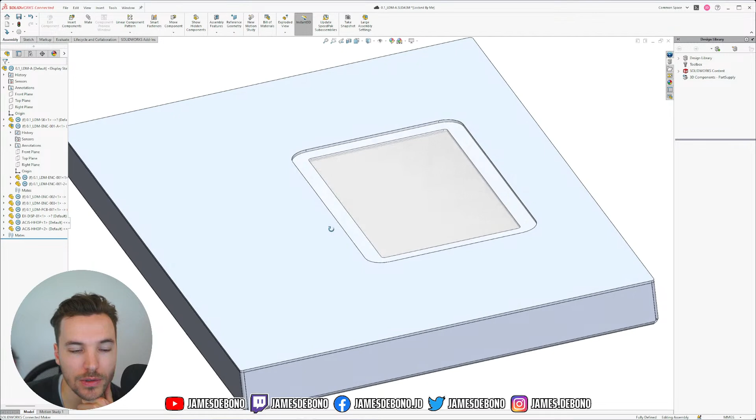So now I have a display protector which is actually slotting into the device, which is pretty cool. And I think I'll probably just have like a black border around here. Yeah, I like how that's looking.

I've got some random jacks here. So, do I keep going? I'm supposed to be meeting up with some friends. Maybe I'll call it there for now.

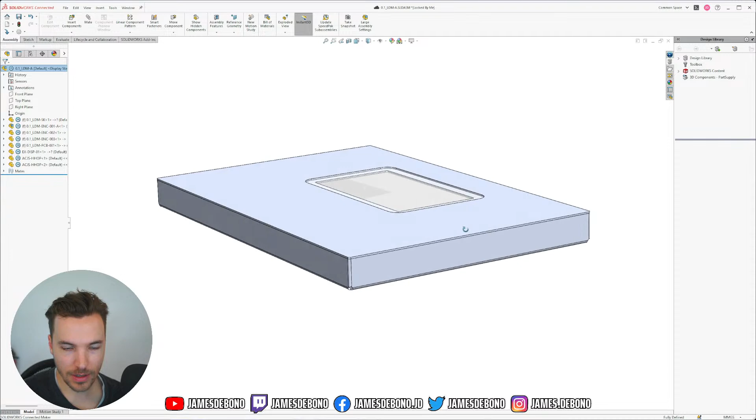In the next one I will either put some other jacks in there or I'll put some knobs or buttons, might try and find some mechanical switches and see if I can fit those in somewhere. Might look like not much has changed since the beginning of this 2-hour session, but I think

getting those jacks in there was a big thing. PCB also needs to come down a little bit more now that I have that second plate in the top, but I can worry about that later, or I can make a cut in the top plate. A lot has changed, and this solution I think is pretty cool. As long as I find a way to join these 2 top plates to each other, I think that's a pretty good solution. And if I decide to just make this machined, then that will also be really easy. I'll just turn this into one part. Yeah.